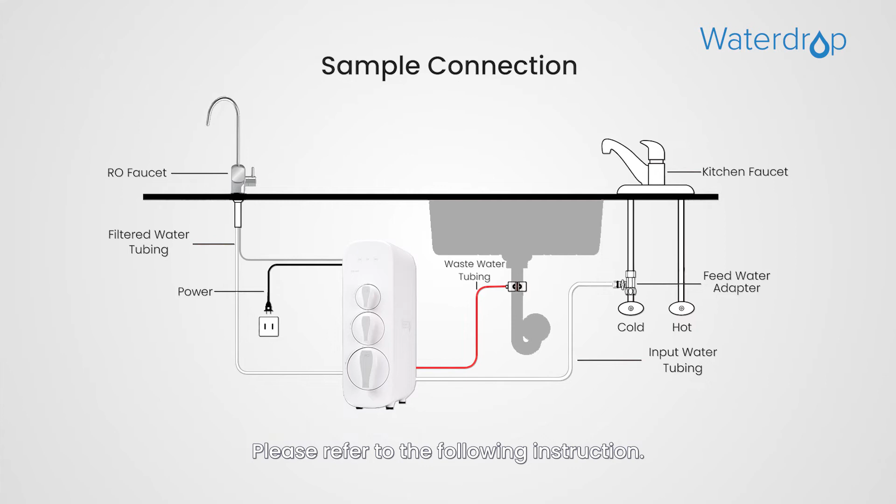Please refer to the following instructions. Now you shall pause for a moment to have a look at the sample connection. These are the required tools for installation.

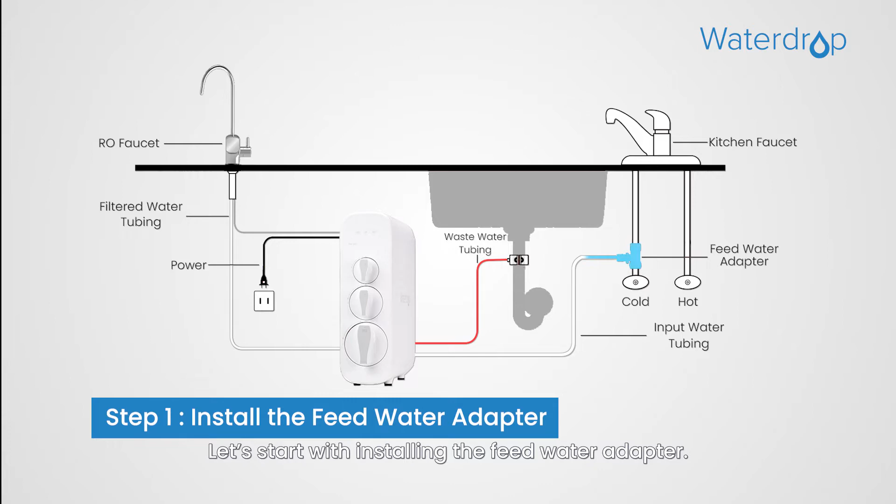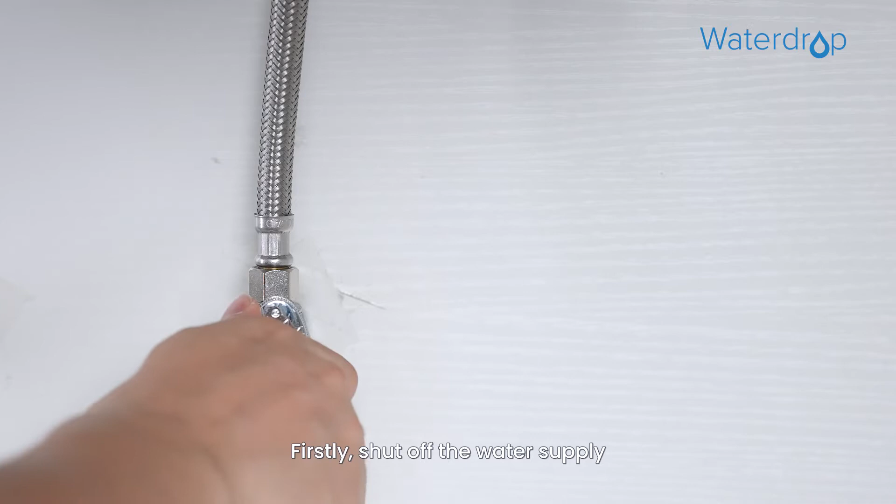Let's start with installing the feed water adapter. We have already connected the input water tubing with the feed water adapter for a smooth and easy installation. Firstly, shut off the water supply and turn on the kitchen faucet to release the water pressure. Then disconnect the cold water pipe from the cold water supply valve. Twist the feed water adapter onto the cold water supply valve with its washer and tighten it with an adjustable wrench.

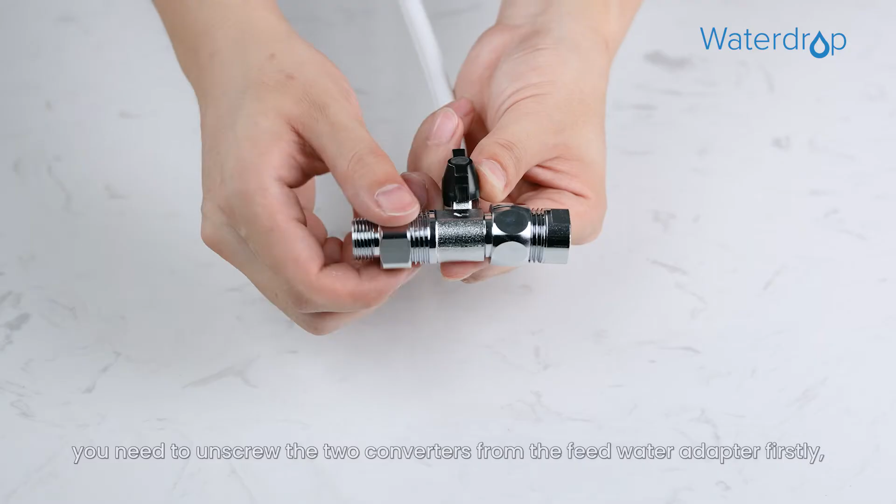If your cold water pipe is 1/2 inch, you need to unscrew the two converters from the feed water adapter first, and then twist the feed water adapter onto the cold water supply valve. At last, twist the cold water pipe with its washer onto the feed water adapter and tighten with an adjustable wrench.

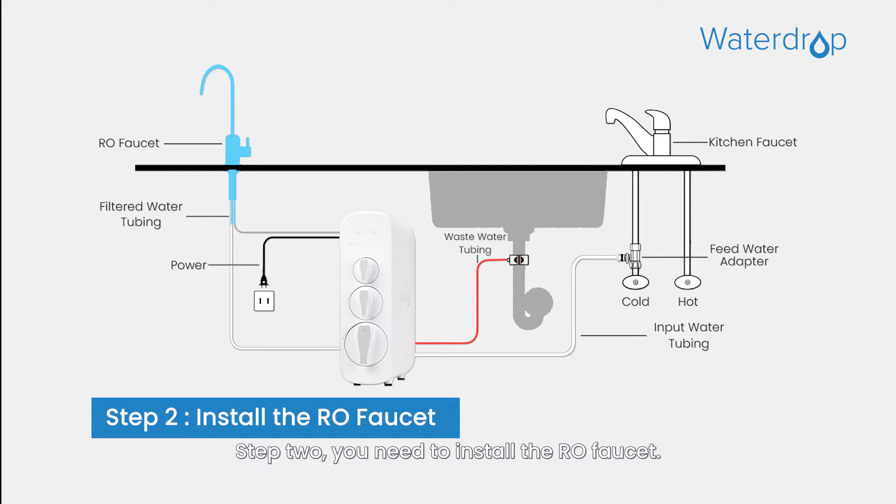Step 2: You need to install the RO faucet. Firstly, insert the faucet spout into the faucet body. Then insert the faucet stem, power cord, and filtered water tubing into the hole on the countertop. Under the sink, slip on the nut and tighten it up. Next, tear off the protective film of the faucet.

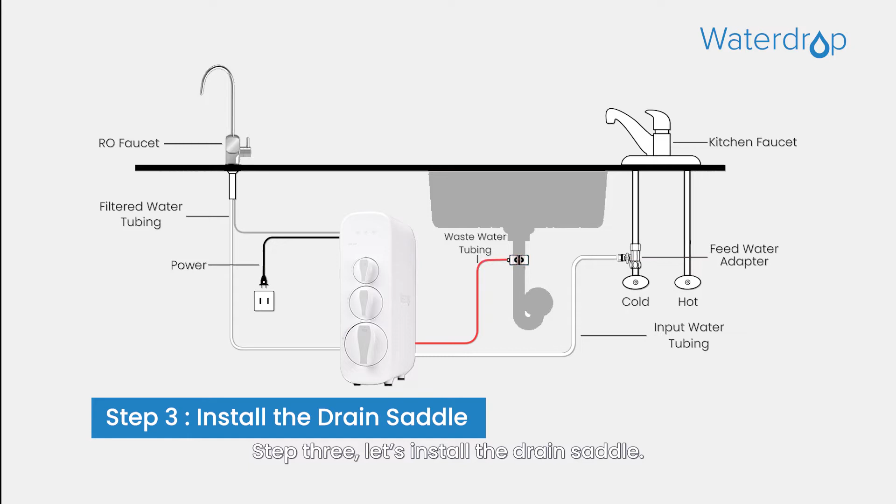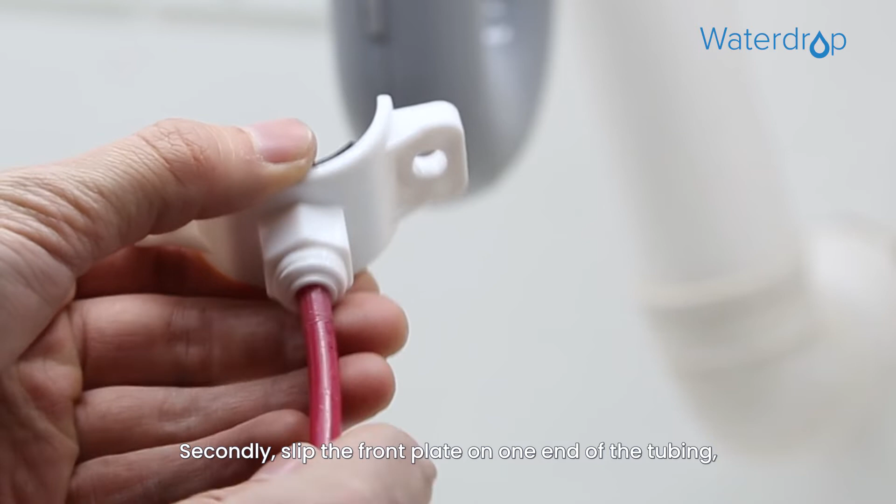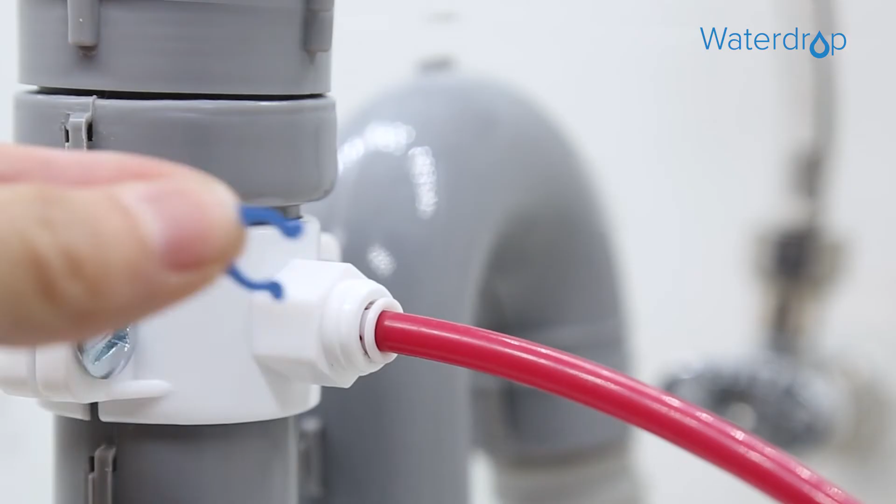Step 3: Let's install the drain saddle. Firstly, drill a 1/4 inch hole in the drain pipe. Please don't penetrate the opposite side of the pipe. Secondly, slip the front plate on one end of the tubing without a mark, and insert the tubing into the drilled hole for about 0.6 inch. Thirdly, position the back plate on the drain pipe by tightening the screws and nuts evenly while leaving the tubing in the hole. At last, pop the lock clip onto the fitting to secure the connection.

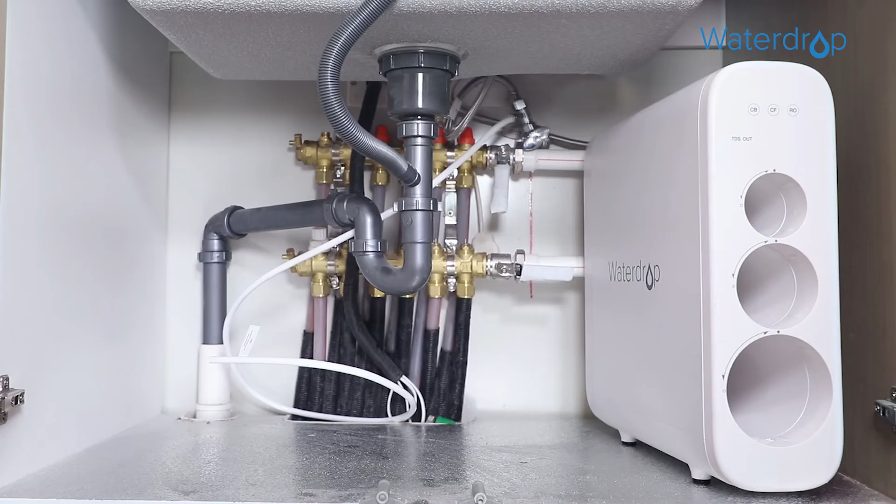Step 4: Let's position the RO system housing. Before you position the system, check and ensure there is sufficient space under the countertop to install the system. Next, position the front panel facing toward you, which will be convenient for future replacement and indicator checking. We don't recommend placing the housing against the cabinet, as there may be vibrations when the system works.

Step 5: You should connect all the tubing. Let's start with installing the input water tubing. Firstly, remove the plug from the input water port and identify the white 3/8 inch tubing which has been attached to the feed water adapter. Secondly, insert the other end of the tubing into the input water port, and then pop the lock clip onto the fitting.

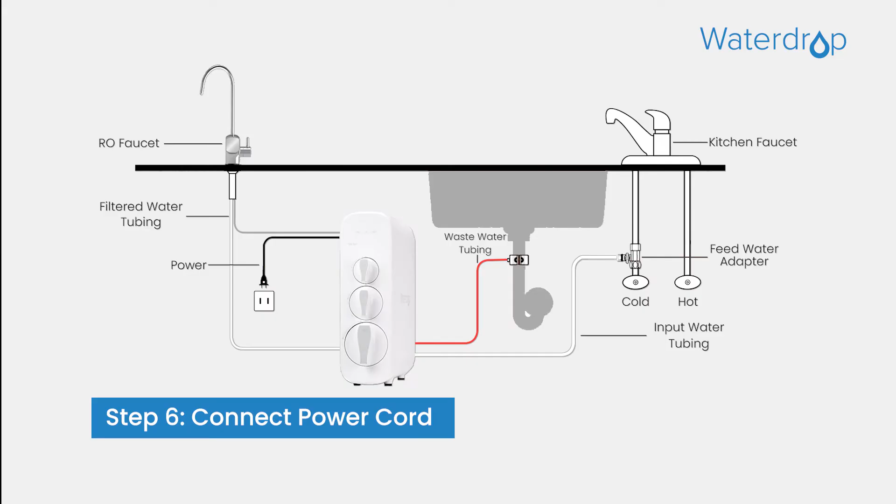After connection, please make sure all the tubing is fully inserted until you reach the mark on the tubing. Step 6: Let's connect the power cord. Start with connecting the RO faucet to the system. Firstly, insert the power cord, which is attached to the RO faucet, into the faucet connector. Then tighten the nut. In the end, connect the power adapter by inserting the DC head into the power port at the back of the housing.

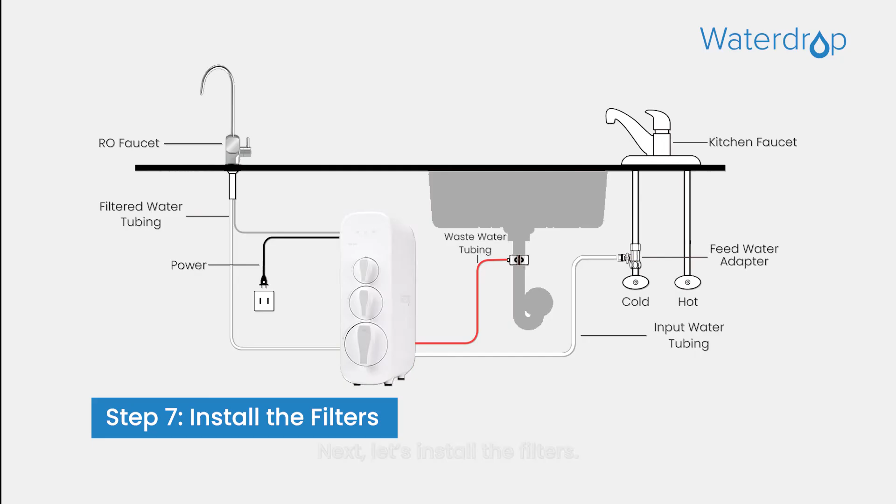Next, let's install the filters. Each filter is marked with a logo and an installation arrow. Insert the filter into its corresponding hole and align the arrow with the empty circle on the housing. Then twist the filter with a little force forward in a clockwise direction for 90 degrees until the arrow is aligned with the solid circle on the housing. When the filter is fitted into place properly, you may hear a clicking sound. Now you have completed the installation of a filter.

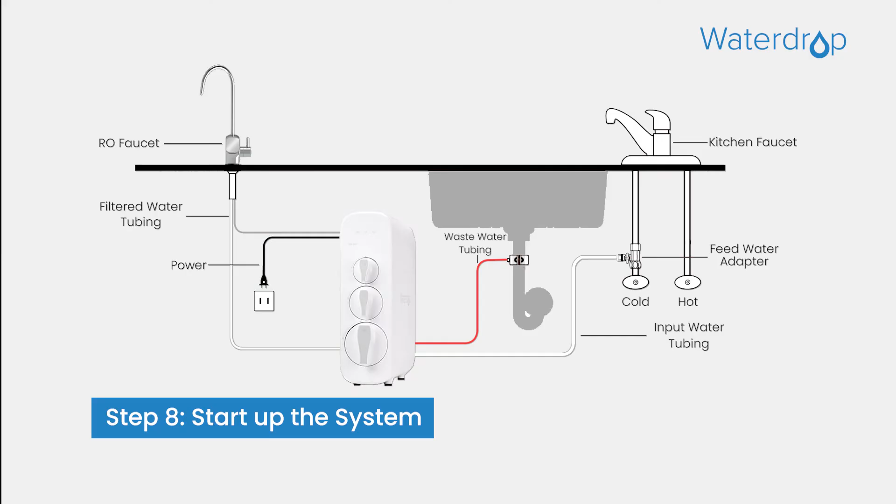Lastly, let's start up the system. Turn on the cold water supply valve and check for leaks. Then insert the plug of the power adapter into the socket. After powering up, the system starts flushing automatically for 5 minutes. Next, turn on the RO faucet and allow it to run for 30 minutes until the front panel screen starts displaying a TDS reading.

Before turning off the RO faucet, confirm the flushing is completed and there is no water leakage. Congratulations! You have successfully installed the system. Please enjoy pure and crisp water with Waterdrop now.